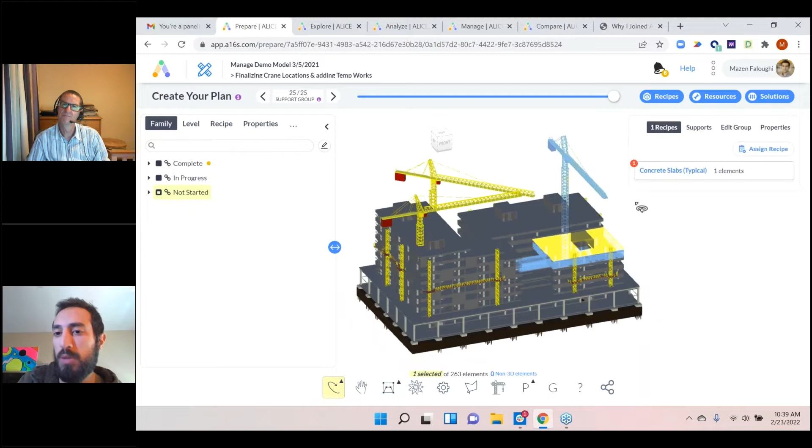What Alice does differently is that rather than having someone who knows all the rules build a schedule, Alice has someone who knows the rules just put in the rules. The AI piece uses those rules to build a schedule. So rather than telling Alice step by step what to do, we say in general the way you build a slab is you form, rebar, pour, cure, and strip. Then the rebar will require 1 to 2 crews and take so much time, depending on the surface area and materials needed. Later, if you want to ask what happens if I have an additional crane, Alice can rebuild many options or scenarios with just one click of a button.

So I'll demo it really quick by starting with the results first and then working our way on how we got there. Does that sound fine?

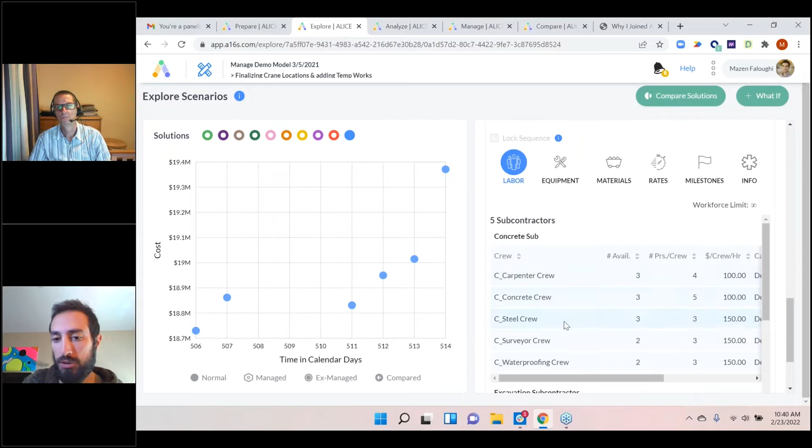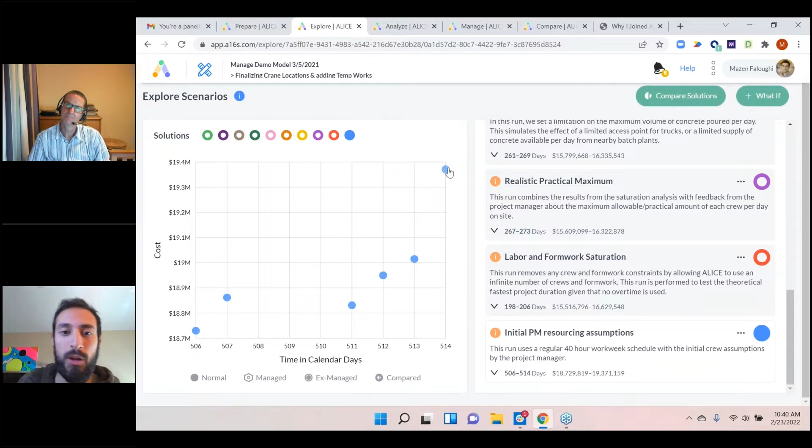So like I said, what we're trying to get to, and this may look overwhelming so I'll clean it up a little, is a place where we've set up the rules in Alice, which we'll talk about in detail in a bit. We can ask Alice questions like, what if I have 3 carpenter crews, 3 steel crews, 2 surveyors, 2 concrete pumps, 6 formwork sets, etc. Alice will figure out all the possible ways the project can be built using the rules I've set up earlier and the availability of resources I have now. Each of those dots is a possible way to build the project with a time, a cost, and information on key milestones.

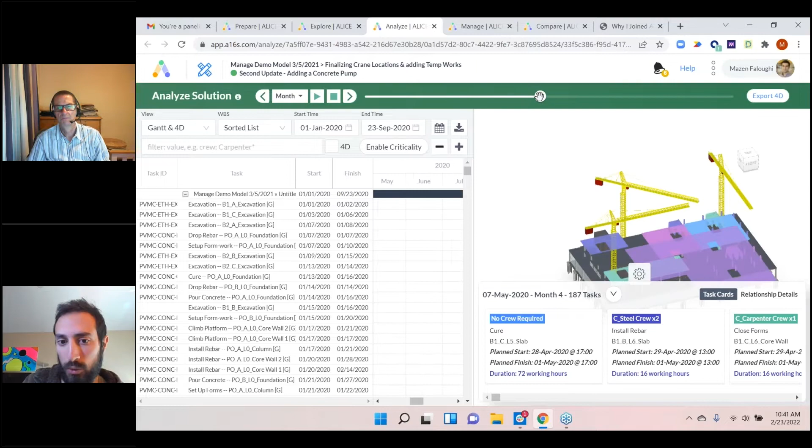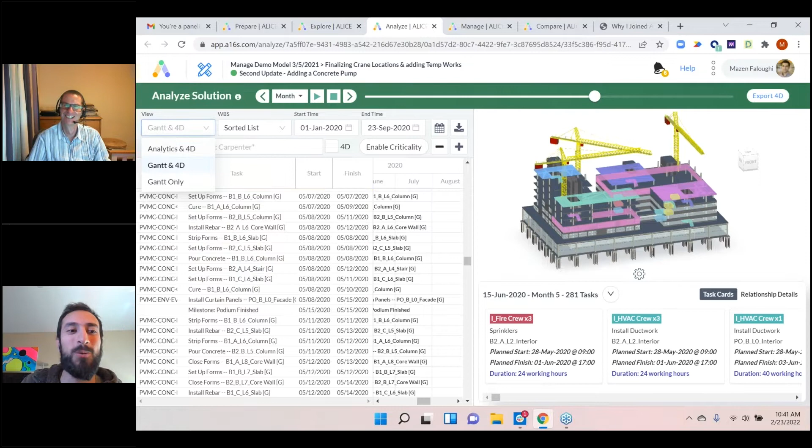So this option may be faster and cheaper than that one, but maybe I'm interested in finishing the podium sooner because I can start making money sooner, so I might take the slower one. Each one of those dots, if you click on it, is actually a fully resource-loaded, color-coded by crew 4D schedule. What we mean by a 4D schedule is you have the traditional Gantt on one side telling you who does what at what time, and then a visualization of that so it's easy to see if there are any mistakes and easy to tie the space to the image. I can jump to any point in time, like a time machine, and see what's going on, the analytics, filtering by crew, cash flow over time, material usage, all of those cool things. And what's beautiful is that it exports to traditional systems like the P6, which we'll talk about later.

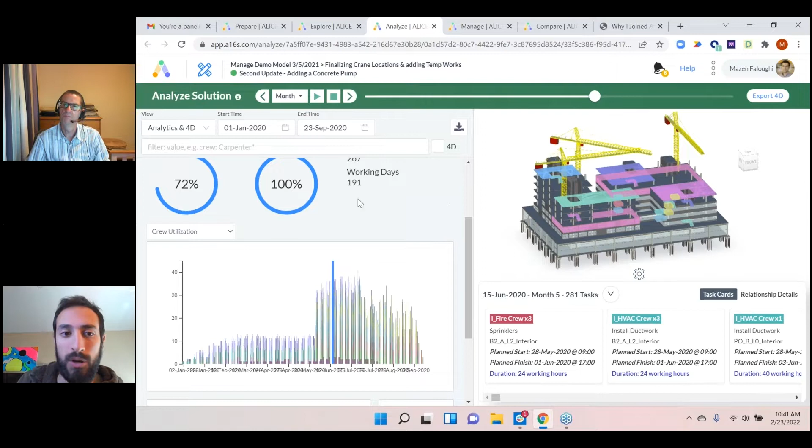So as you showed, it's not just about one answer. It's saying actually you have some options here, depending on what might be your most important imperative, whether that's cost or time. You can actually look at those different possibilities.

That's an amazing question. Going back to when I used to do this manually, you talk with these people and they always say, oh, we could do it this way or we could do it that way. Every time you have to make a decision, maybe you'll say okay, let's analyze both ways. But then there's another decision, and you're like okay, now I'm going to have to pick one. And then there's another decision. So by the end of making only 4 decisions, even if you've analyzed 2 cases, which most projects don't even do, you're missing out on many other options that could have been way better, because the combination of choices you make compounds so many times.

If you're reading through this while I'm showing it, I was on a project where in one of the options, it looked good. They had committed and signed a contract for an 18-month schedule. Then when we visualized it in a video like this, they realized the crawler cranes were not moving in time, moving too soon to strip the formwork on a huge wastewater treatment plant. That was a $1.1 billion project. Once they corrected for that, the 18 months became 4.5 years, so they had to redo the work from scratch to figure out how they could fit it.

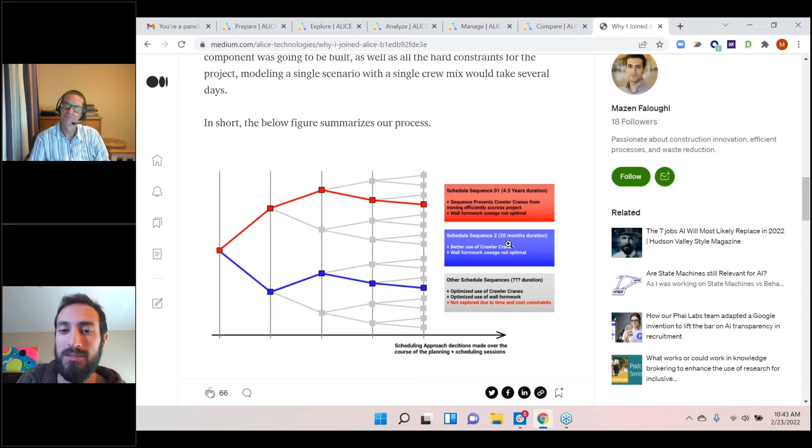They were able to bring it down to 20 months, but it was still like they lost on this because they had already committed to an 18-month duration. So to answer your question, we show you various ways you can build it so we make sure you've evaluated all of the possible ways with what you currently have.

And it doesn't stop here. Now is the fun part. Now you can ask, what if I have an extra crane? What if I have an extra crew? How will this change? In the traditional process, you have to redo everything. You wouldn't have to redo the list of tasks, but how they connect and sequence, you'd have to redo everything.

So in Alice, I can say, okay, what if I have unlimited crews? It will give me a much faster, much shorter schedule, but it's not realistic. It will tell me what actually ended up being used. So it will tell me, you gave us infinite carpenters, I need 11. You gave us infinite concrete crews, I only need 2 because we have 2 pumps. You gave us infinite steel crews, I only need 13.

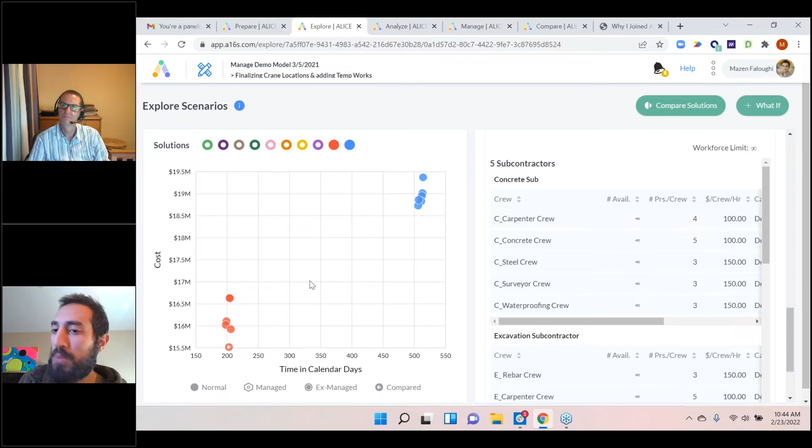So what I usually do is take this data, bring it to the superintendent, and show them: Alice said the best case scenario is 13. Is that possible? He might say, no, but I can do 10. Alice said bring 20. Is that possible? No, but I can do 6. So we get the realistic practical maximum.

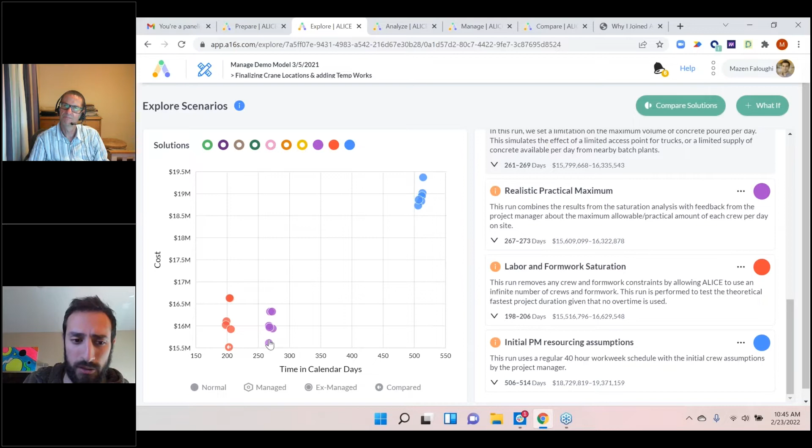So that's all of the things that are possible. And it's not always like, oh, 10, I can do 5. Sometimes it's like, I thought we needed 7, you're telling me I only need 5? That's amazing. So we get somewhere in the middle. We're still improving a lot, but we can still ask questions.

On one project, we got an amazing schedule, but when we looked at the concrete availability, kind of like the crawler crane case earlier, we realized that on one given day you'd have like 200 trucks on site for that schedule. That's not realistic. A lot of times people make these mistakes in traditional scheduling. Here, because you have the model, and we'll talk about not having a model later, you can use the volumes to predict how much concrete trucks you're going to need on any given day.

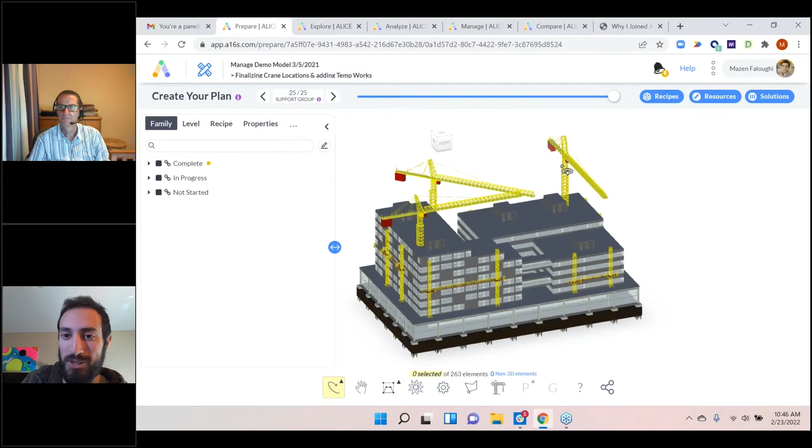And guess what, you can limit that in Alice. So you can say, I only need to have 20 trucks, what is my scenario? So Alice will give you more options. You can say, what if the facade crew works on a night shift? So now you're changing the calendar. All the concrete sub works on default, all the facade sub works on night shift, so they don't have to compete for those tower cranes that everyone likes to compete for.

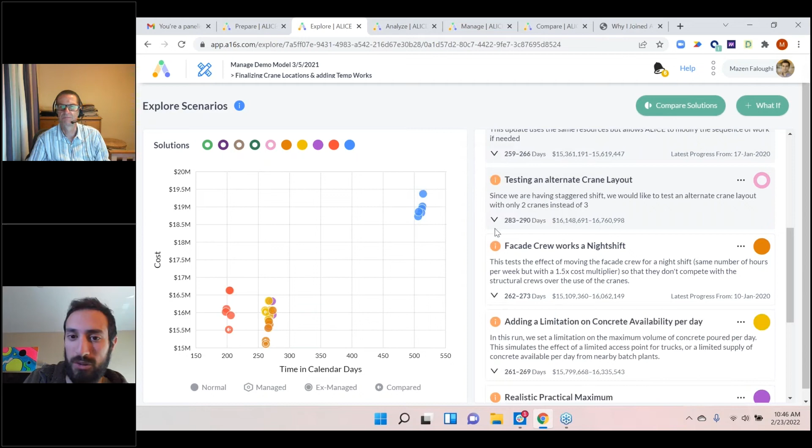So you can analyze all of these scenarios, get results, and pick which strategy works best for you. You can test different positions of the cranes. Alice will automatically recognize what elements the cranes can reach as you move them around. It's really, really amazing how you can set the rules once, ask all these questions, and even reuse those rules on other projects.

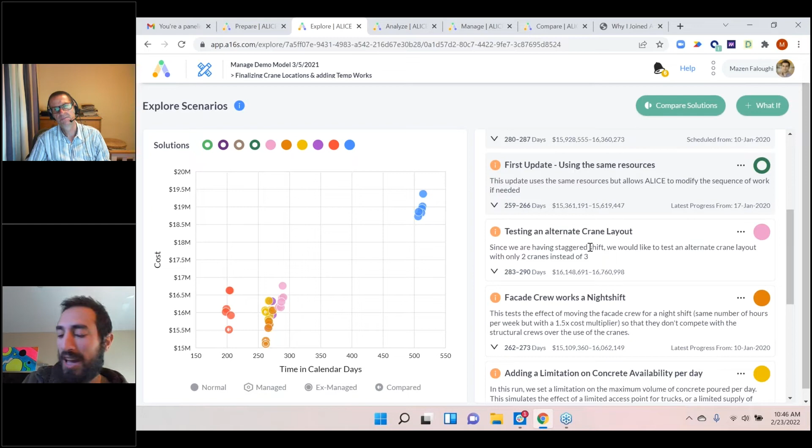So I'll stop for a bit, maybe take a question. I was thinking, because it's almost a cliche to talk about the fact that obviously AI needs data to perform, what are the kind of basic requirements about data that a client would need to use this? Both in terms of, do they need a 3D model, and also what kind of data specific to the way they work or the rules they'd need to train it, or is it pre-trained? What are the data issues basically?

That's a great question. It does need data. This may scare people, thinking, oh, I might not have that data, but guess what, it needs exactly the same data you would need to build a schedule the traditional way. So if you're building a schedule traditionally, you already are using that data. If you're not, then probably you're not building a schedule the right way. Sorry for saying this, but it is the same data.

So what is that data? First, you need to know what you're going to build. So you might upload a 3D model and Alice knows what you're trying to build. If you don't have a 3D model, you can kind of see at the bottom it says 0 non-3D elements.

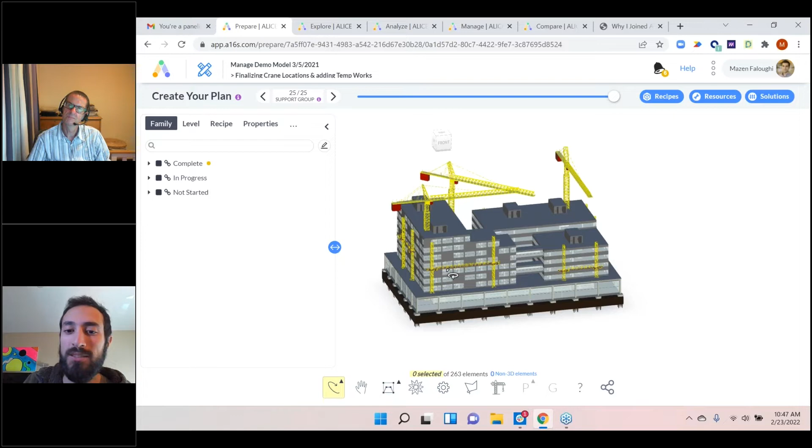We just released a feature. It's still not fully released, so the usability isn't amazing yet, but we're partially adding stuff that allows you to add non-3D elements and theoretically just not upload a model, just add non-3D elements and link them together. Currently, people are working around this by uploading a 3D model that represents a diagram. So they can get that done in literally a few minutes and upload this. But very soon they'll be able to just build that diagram inside of Alice. So that's the first piece.

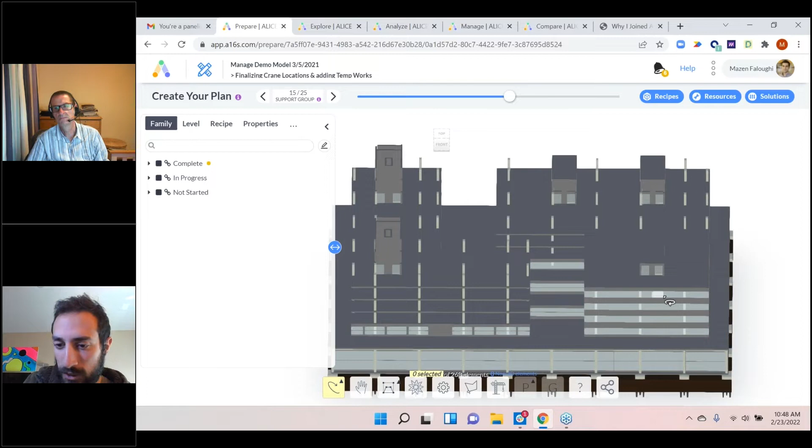You need to know what you're trying to build. The second piece is you want to decide your level of detail. So if I look at this over here, you see all of these columns. I can individually hover over each one, or I can individually hover over each glass panel. But do I want my end result to tell me build this column first, then go over here at 9:30, then at 10:45 go over here, then at 11 go over there? Or do I want Alice to tell me build zone 1, then build zone 2? Or maybe if it's a 30-year master plan, some people want the detail to be build level 1, build level 2, so not even zone, maybe even build building 1.

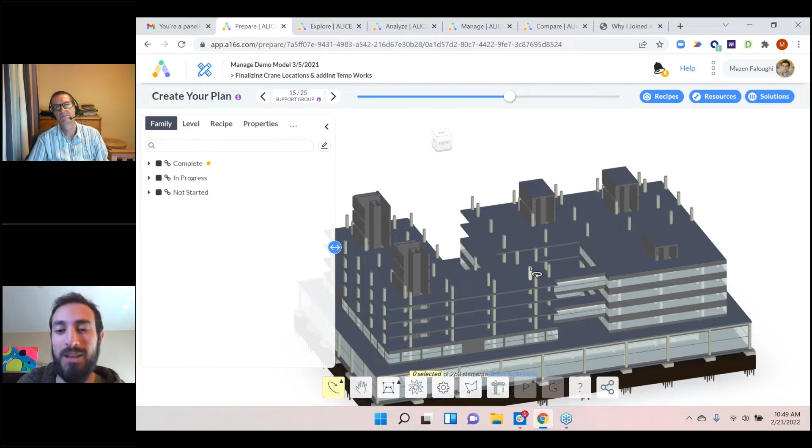So you need to decide what level of detail you're trying to optimize. Is it element by element, panel by panel, or is it nut and bolt by nut and bolt, very unrealistic, or is it zone by zone? By the way, the nuts and bolts level can be done - I've worked before on a power plant outage where they're out for a limited number of hours, do everything, then turn on again, and they have penalties for every delayed minute. So in that case, you might want to plan at that detail. But in general, you just want to plan by zone. So you decide that. Now, how do you decide that?

It's a very easy process called auto grouping. It uses the parameters from your BIM, or if you don't have a BIM, the parameters that you've input, and groups things. So I might tell Alice I want to group by level, by zone, and by type. Alice does everything for me. Or by zone, by level, and by work package, Alice does everything for me. So it's the level of detail.

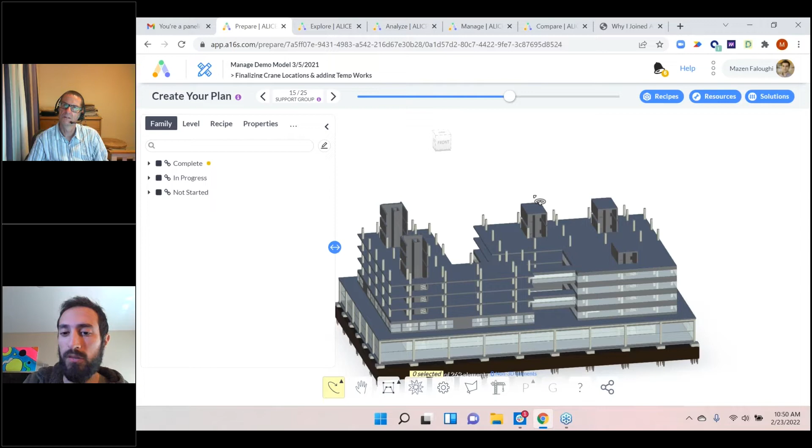Then there's a semi-automated step. This applies only to 3D models, which is the detection of the physics side of it, the structural part. So when Alice is trying to build a schedule, Alice will explore the option, should I build zone A, and then C? Or shall I build zone B, A, and then D, or whatever? But Alice does not want to play with building level 2 before building level 1, because it's impossible - you can't have a level float. So when you click on something here, you see our engine automatically detects that you cannot build the yellow before you build the purple. You cannot build the blue before you build the yellow. So purple for previous, blue for next.

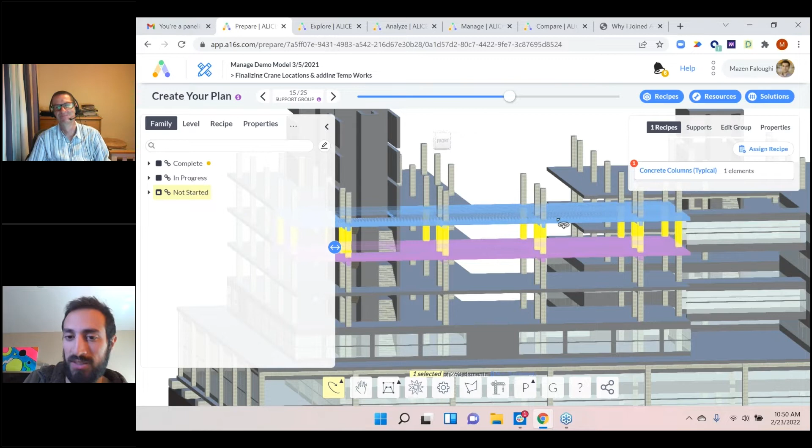I said this is semi-automated because a lot of times people want to go in there and validate. They'll see, oh, I have a constraint that's not necessarily physics, but I want to add it manually because the slipform system - I don't want them to go too high up, even though they can theoretically. I want to add these constraints. So you do that. That's step 3.

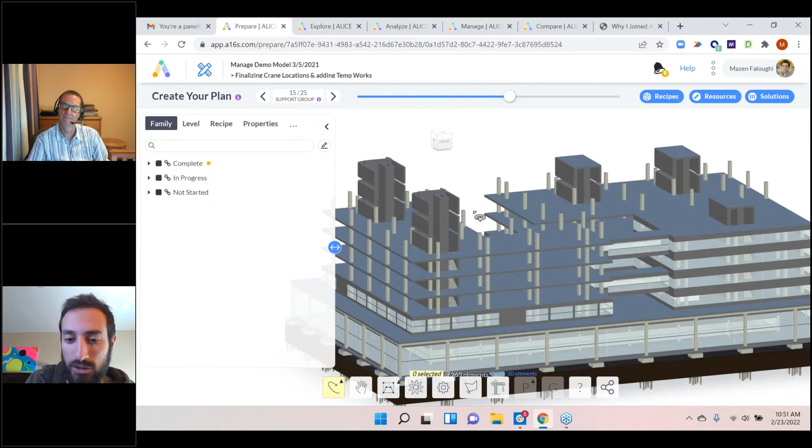And step 4 is the final step. This is the bread and butter. This is where you capture knowledge and you can reuse it. And it's so amazing - it's the recipes. The recipes can be very simple or very complicated. And the recipes describe how you build something or how you move through an area.

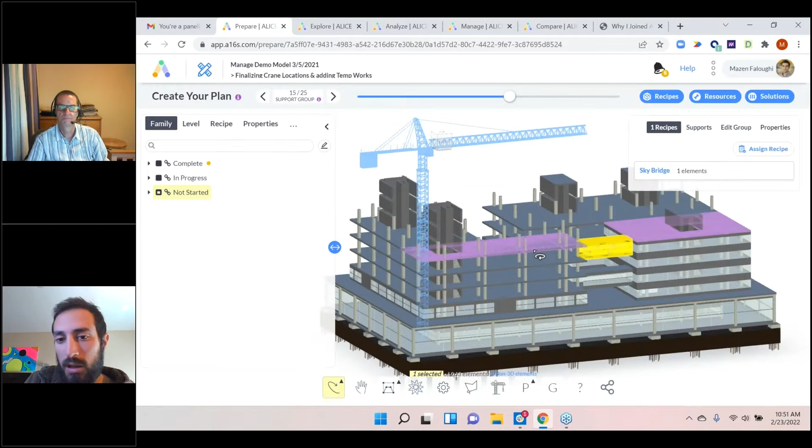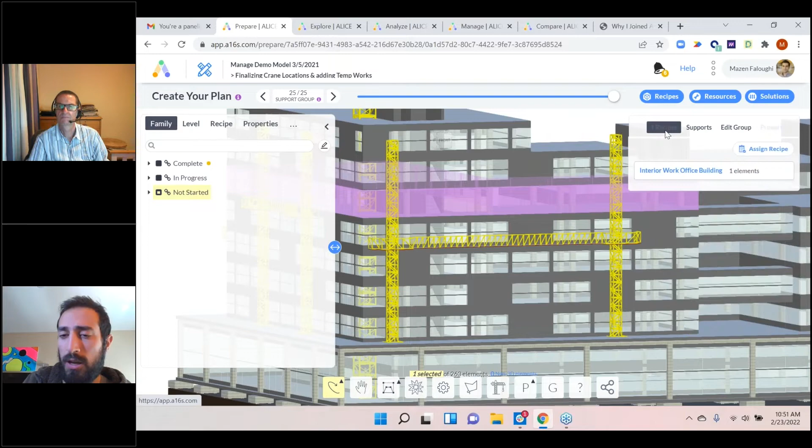So a very simple recipe could be these prefab sky bridges - it's just saying install these bridges. I'll talk about the details in a second. A slightly more complicated recipe could be that slab where we saw earlier - it's form, rebar, pour, cure, strip. You might have an even more complicated recipe for interiors. For example, here we didn't get all of the MEPs in because we don't need to. We just put a placeholder with custom properties explaining the quantity of duct, the quantity of piping, etc. And then in the recipe, we put all of our details. So I need the layout and top track, opens up for the gas sprinkler and duct, interior framing, all of that.

Now, what's really cool is this is not just a set of activities that need to be done in sequence. This is where you ask people what they need and make sure they have it. So when we plan traditionally, you might ask someone how long it will take to do the formwork here, or the rebar. They might tell you it's 3 days.

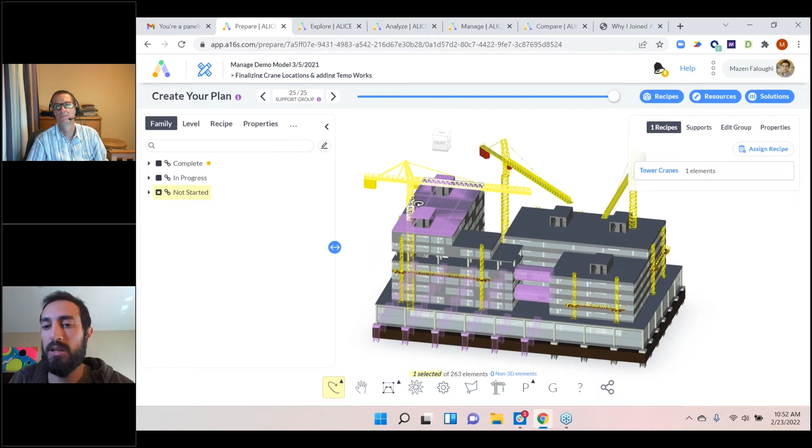You go on site and you'll see that in the managed piece, it might take 10 days. And you're like, hey, you told me it took 3 days, why is it taking 10 days? They're like, yeah, my estimate of 3 days was correct. However, I assumed that this tower crane would be available to me. I've gone on site and I keep calling the operator and he's busy with someone else, I've never been able to reach him or her. And then the 3 days turned into 10 days.

Now what we do in the recipes is we ask everyone: what do you need? How much do you need it for? And how many of it do you need? So here we're asking someone like, okay, you need 8 hours, but you also need one of these 3 cranes. You also need the material to be available. You also need equipment, or anything you can put in here.

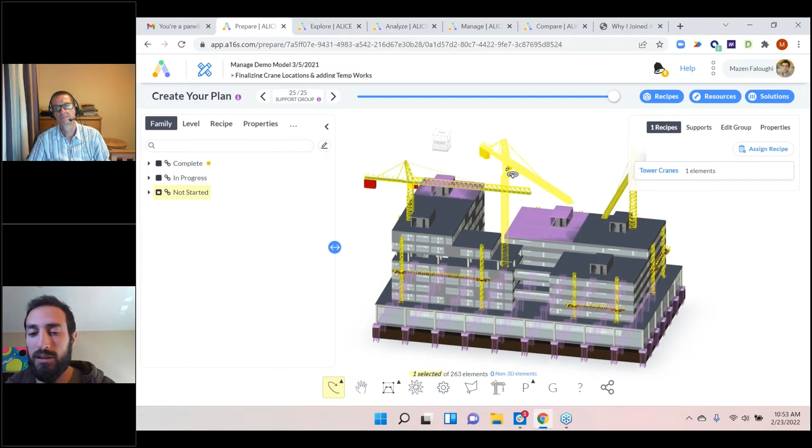So when you're scheduling with Alice, when the AI goes, it puts activities in such a way that no one who needs the crane at any given time is scheduled to go there when the crane is not available to them. So it makes sure they're not fighting on site over who can call this guy first and who can get the material there first. They just have it available to them. That's the big piece of what we use the AI for.

So I suppose thinking back to my days working in manufacturing, it's a kind of fundamental capacity resource planning view, where you have those finite resources, you need to schedule the availability and understand who needs them for which period of time, and make sure you have that linearity - like clash detection in a BIM sense, isn't it? Spot on, that's exactly it. This, and the different sequences in which those rules can be satisfied, is essentially what Alice is doing.

And can you set any other kind of external dependencies? I'm thinking things like supply chain limitations, or even - not trying to predict the weather - but can you model those kinds of externalities as well?

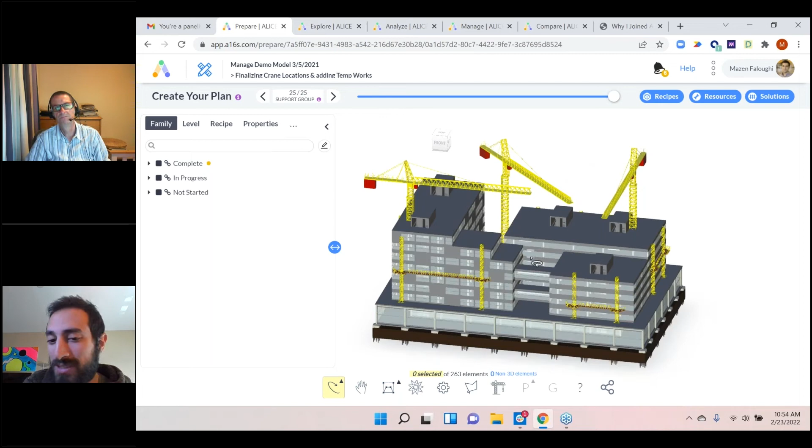Yeah, so there's a bunch of stuff we've modeled successfully, and there's also some stuff we haven't done yet. As people request them more, we might build them into the product. So the cranes piece was there - based on the radius, it detects what can be used, the reach, etc. This was added based on customer feedback.

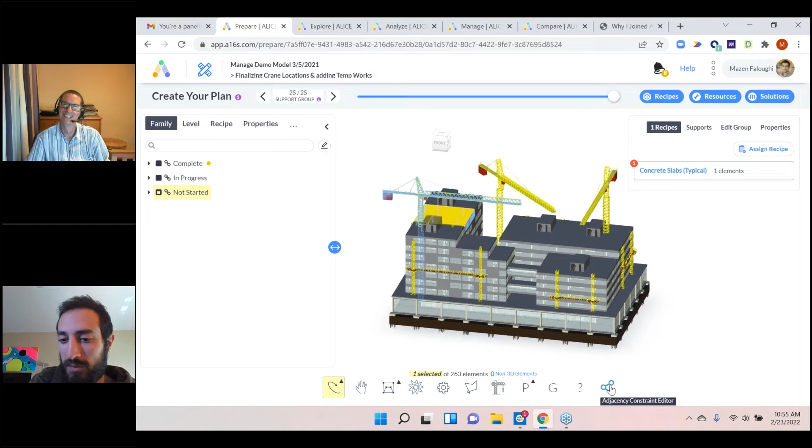For infrastructure, we've added something called the adjacency constraint. So if you're building a building, it might be okay to build this, then jump over here, then jump over there, as long as it gives you a more efficient schedule. But if you're building a bridge, you're not going to start on one piece, then jump all the way to the end, then jump back to the center - it doesn't make sense. So we've built the adjacency constraint that recognizes pieces closer to each other and prioritizes them. So if you're building 1, 2, 3, 4, 5, the 3 can only be built if 2 or 4 are built - if an element adjacent to it is built.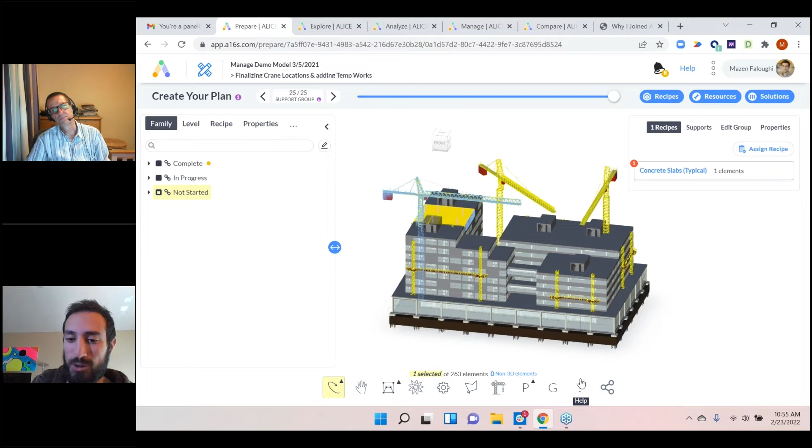We've added other constraints like that too, like external links. So for example, for slabs, maybe you need to form, rebar, pour, cure, and strip, but sometimes after you pour, you can move on to the next element while it still cures - but strip will still block the schedule because it releases formwork needed somewhere else. So based on how many pieces of formwork you have, it will change the whole hopscotching sequence.

I've also worked on a project that was really interesting, and I'll get to procurement in a bit, where they had to move people around. It was a facade renovation where people who had desks adjacent to the facade had to be moved to temporary offices and then brought back.

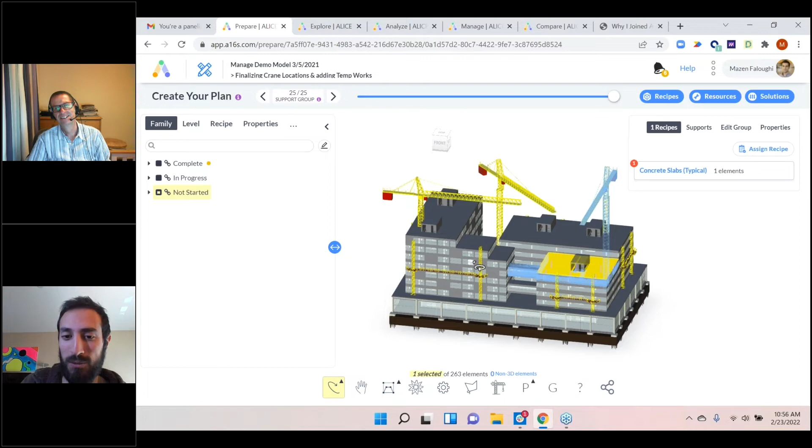There was a limited number of temporary offices, and we needed to find the most efficient way to do this. Now, people are not materials, but we don't have this modeling piece in Alice, though we do have a piece to model materials. So I modeled people as materials, with each supply activity, each demolition activity taking away a piece requiring a material, and each reconstruct activity supplying back that material. Then we'd have a limited amount of temporary offices, which is the limited amount of the material. So in a way, we treated those people like we did treat the parking spaces for the concrete trucks. It sounds a little bit weird, but it does work and it gives us good results.

I suppose then effectively they are a resource that has constraints, and you call it materials, but it's a resource that you can model in that way, isn't it? Exactly. We've had a lot of creative ways where people use Alice to model things we hadn't thought about before, but we've provided them all of the tools to be able to do that successfully.

And how about interoperability? You talked about exporting to P6 as an example, but how can you make sure that if you're in a kind of broader common data environment, Alice can sit as part of that, and that data can flow in both directions potentially?

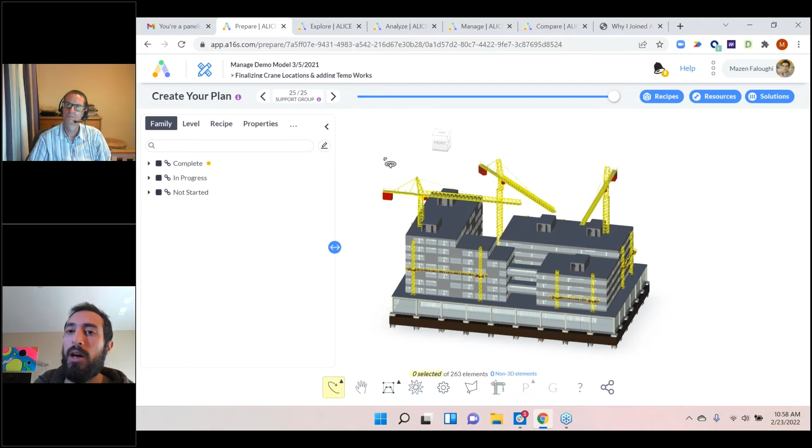Yeah, so interoperability in what we do goes in two main directions. There's interoperability with the 3D modeling systems, because we're marrying those two worlds of 3D design and planning and scheduling. For that, we import from Navisworks, and we have plans to expand. Navisworks is interoperable with most of the 3D systems out there, so we've rarely had issues getting a model into Alice, unless it's a really huge model that typically isn't used for planning. Then we'd simplify it a bit and import it, or use 2D.

Then there's the interoperability with scheduling systems. So you've worked so hard on this schedule, but your contract requires that you submit a P6, or you'd like to do some extra analytics that we don't show in Alice. So we have two main exports. One is the P6 - this is the industry standard, and it's very customizable. If you model P6 using resources or activity codes, we give you the option to do both. If you prefer activity codes over UDFs, or costs as resources or costs as expenses, we provide the option. Or if you like to do resource leveling in P6, we provide the option to remove resource logic. So it's very customizable.

But we also have the CSV. The CSV is like an Excel data dump. You open it the first time, it might look overwhelming - there's so much - but we've given you all of the data there so that you could practically rebuild anything you want based on that data outside of Alice.

And in terms of suitability for either size or types of projects, what's the best fit? And are there any edge cases where you still find it challenging to deploy Alice?

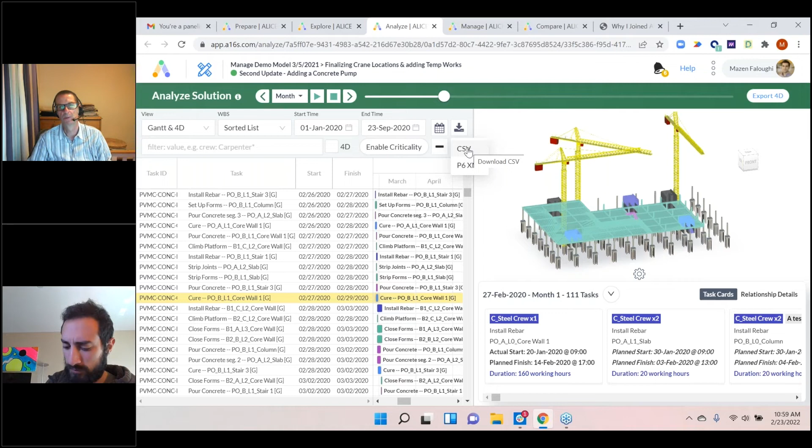So I'm showing here a commercial building, like a medical establishment, but we've had a lot of success recently - most of the headline successes, I guess, with the infrastructure segment. So roads, highways, bridges, airports, all of that stuff. But we still love working with the commercial sector. Realistically though, it probably has to be a project above 50 to 70 million for it to be worth going through the effort of bringing in the rules, implementing a new technology, bringing everyone on board, because a big portion of the success depends on bringing people on board internally. So if one user is using Alice and getting all these amazing results and no one else is seeing it, you're not really going to get benefit.

And that's where our customer success team helps a lot with the organizational change piece of it. I mean, have you seen it? Because, it's a bit of a cliche, but often introduction and adoption of technology can bump into these people issues, to put it bluntly. Have you seen instances of resistance to this? Are people concerned that it's in some respects de-skilling their role, or are they seeing it as a positive augmentation of what they can do rather than a threat?

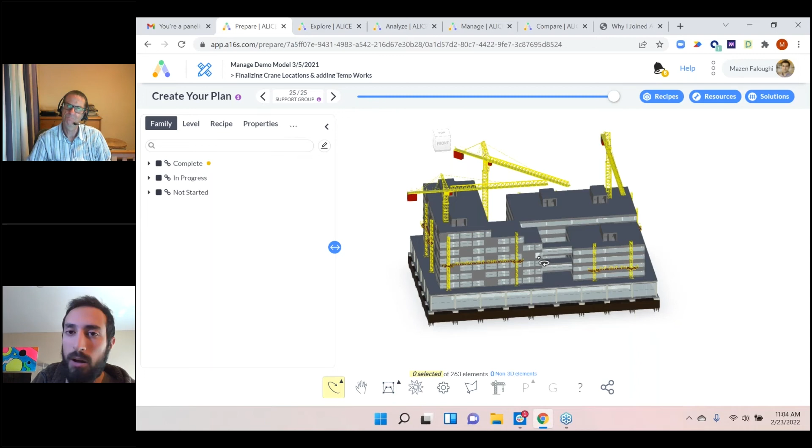So you already went over that piece. You will definitely have fewer changes, but you'll still have changes from all these things we can't control, and that's where the manage piece kicks in.

Once you have a schedule you like from these, you pick it and say that's the one I want to take to manage. Then as you're building your project, for each activity you can say this one was completed, it was completed on time, we spent more hours than planned. So you're collecting all of that data, and there's two sides to it.

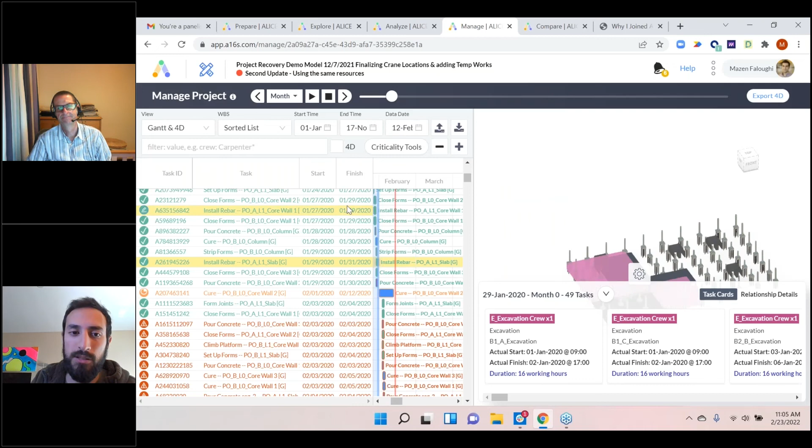There's a side where Alice gives you analytics. The recipes we built earlier were based on estimates, but now I can check for each operation what the estimate is compared to the actual, and decide if I should go back and update those estimates. So you told me close forms would take 60 hours, but it's been taking 80 — though there was a learning curve and we stabilized, so it's fine.

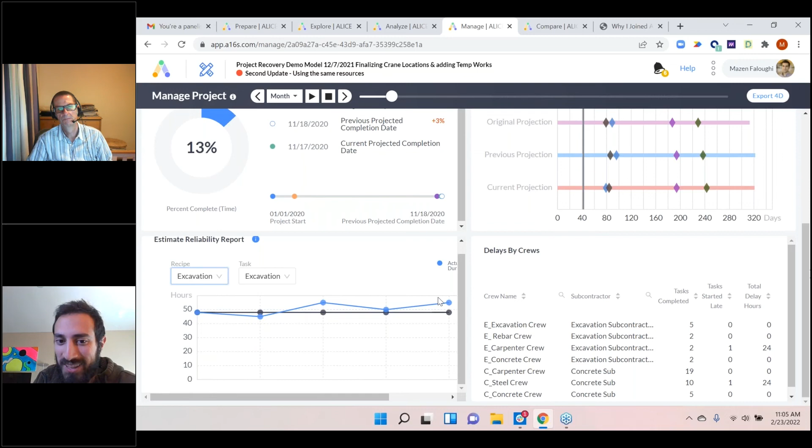However, rebar also stabilized, it's fine. Let's pick another example, excavation. It's always taking us longer. Is it worth going to update the estimates so that we can plan accordingly? And then the other piece is reschedule versus resequence.

So when you add these progress, this is really cool. If you have a schedule where some activities are delayed and some other activities are early, so you've completed 10 activities, 5 of them were delayed, 3 of them were on time, 2 of them were early.

So now in construction, when you reschedule in P6 or any other system, especially if those activities are on the critical path, the schedule will get pushed. So if you've completed 5 activities late and 2 activities early, we don't care that you completed the activities early. The late activities are going to push everything.

With Alice, you can still have that if you care about having the same schedule that you've agreed to. Or you can test resequencing. Because Alice knows the rules, Alice can leverage the activities that completed early. Several times I've seen it where you've completed 5 activities late and 2 activities early, and Alice rebuilds a sequence that takes advantage of those activities that finished early, and can sometimes build a schedule that was faster than the original schedule because it's taking advantage of those activities that finished early.

So it's really cool. I don't recommend that you use it all the time because there is a cost of changing the commitments. If you tell them, hey, we agreed to build it that way, but now we're going to build it that other way. People ask me, oh, so should I reschedule once every week and then resequence once every 3 months so that we kind of balance it? And I'll say, sounds good, but it costs you nothing to analyze it every week in Alice. So every week you can see if it's worth it to reschedule or resequence, and then you can decide if you want to do this or not.

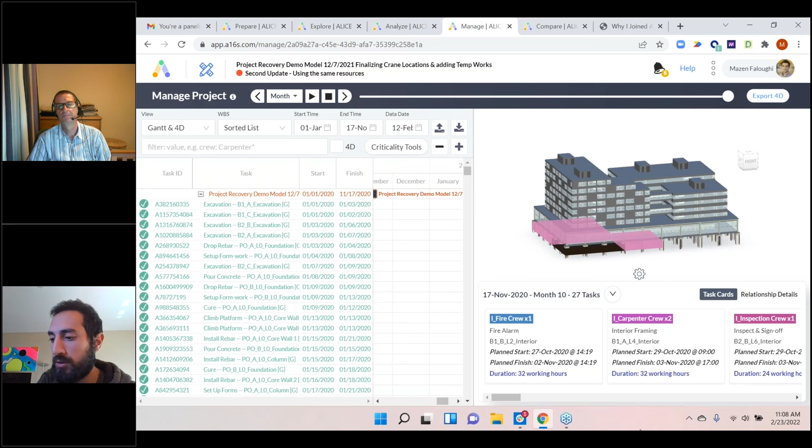So this could manifest sometimes in the model changing. So if they've added a floor, definitely you need to update. Sometimes it's things like they've swapped this piece of material for that other one. In those cases, even though the model updates, I usually don't update the model and I just go and change the recipes accordingly, because this is a simplified model anyway, so you don't have to overdo it, right? But a lot of times they add things, like you add 2 floors, well, okay, we have to update the model. ALICE will retain the work you've done on the previous iteration, but you will have to make sure that the new elements are assigned the correct recipes and so on.

Well, this has been fascinating. Have we missed anything? Oh, there's a lot to talk about.

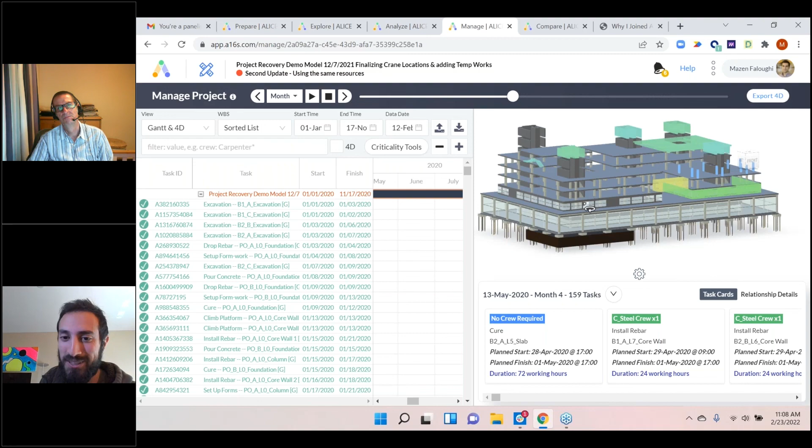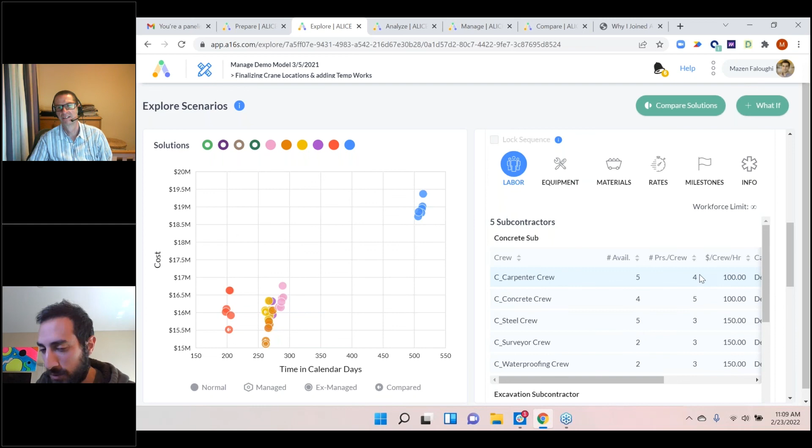I don't know, there's a quick thing I can maybe end with: a constraint we built specifically for an airport project right before the pandemic hit, and it's proven to be very valuable for the pandemic. It's to specify how many people are in each crew. So we have 5 carpenter crews, but each crew has 4 people. We have 4 concrete crews, but each crew has 5 people. 5 steel crews, but each crew has 3.

And then you can limit the number of people allowable on site. So ALICE will make sure that you never have more than 60 people on site due to COVID, for example, using combinations of these crews that have different amounts of people. It's really, really fascinating to see how that works.

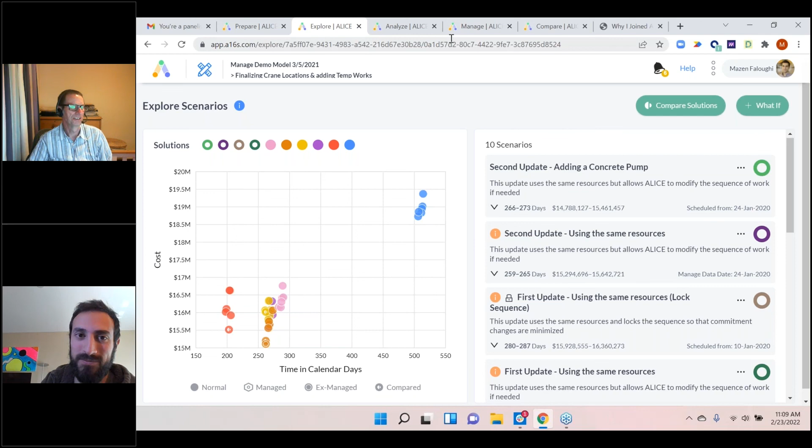Well, I suppose it's a sad instance of technology helping, but as you say, it's been such a critical thing to understand how many people you have on site at one time, and if you have some, as you say, some new limitation.